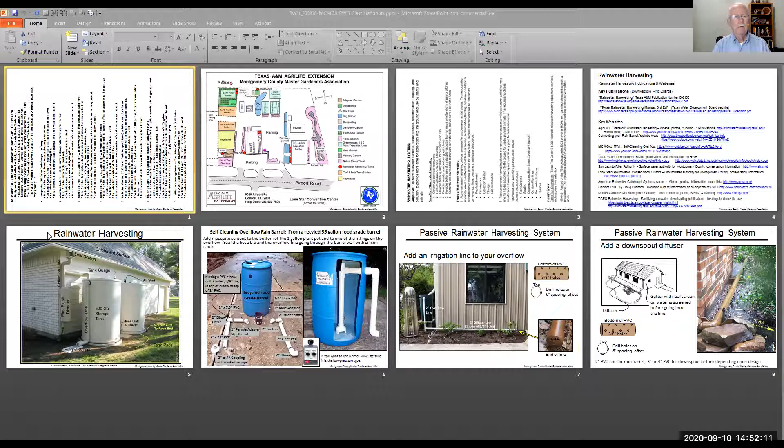This is basically a summary of our projects at the extension in rainwater harvesting. Here's a map showing our project locations. This is a summary of rainwater harvesting in general, just basic bullet points. And this is information on key publications and key websites for rainwater harvesting that could be helpful for you.

This is the detail I wanted to show you specifically. It shows what parts are used in making the self-cleaning rainwater harvesting barrel, adding this cross piece and this vertical section. That's not very much, but it can really save you a lot of work later on. We have a couple more examples. That's what I wanted to show you, and that should be either as a handout or on a flash drive for you.

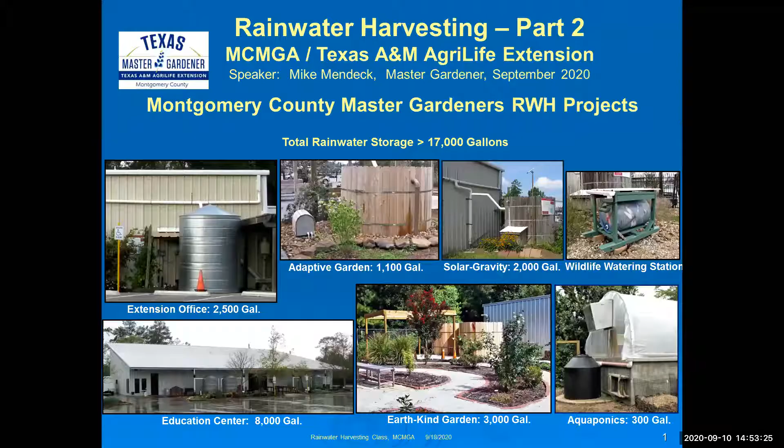So now we're going back to our other shared screen. We finished part one on general information, passive rainwater harvesting, and active. Now we're moving into the uses of rainwater, components, and maintenance.

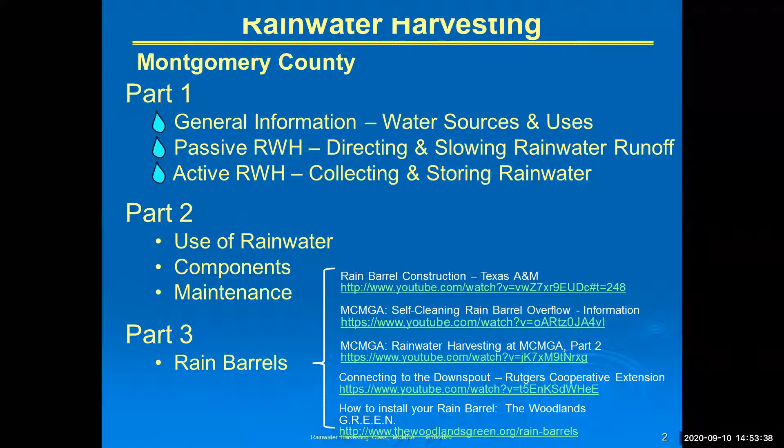Flowers and trees, that's a good use for rainwater, that everybody likes and knows. For vegetables, fruit and vegetables, it's great. For ponds and fountains, not everybody thinks of them, but they're an excellent use for this. Fish, birds, and insects really enjoy it.

It doesn't matter what impurities might be in it - I'm talking about bacteria from bird droppings or leaves or branches or whatever might be there. It's perfectly fine for them.

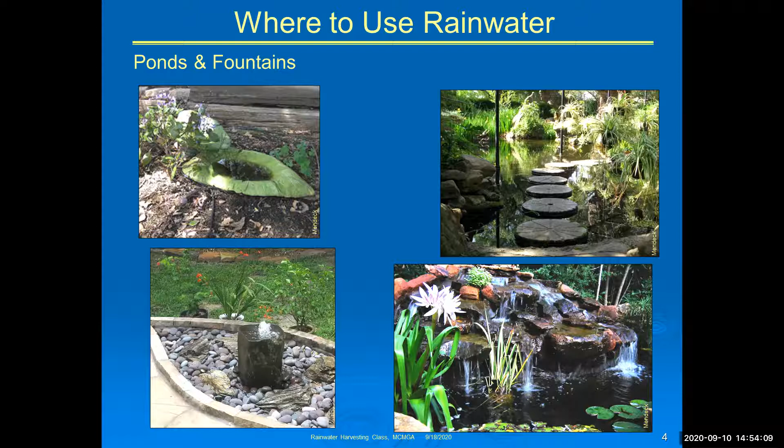Wildlife watering stations, that's one of the things we use them for, and here's one set up. The water is dispensed through a long line, just dripping into this little bird bath slowly, maybe one drip every couple seconds or every 15 seconds, depending on the evaporation rate. There's no pump needed for this - you just have a little valve and turn it on, and gravity pulls the water down. You can crank it open for a full stream, or restrict it down to just a few drops. That's perfectly fine.

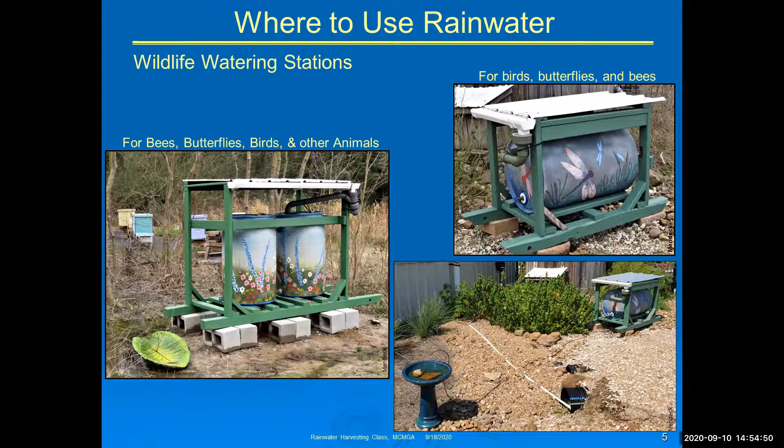Here's one for the bees, also used for squirrels, rabbits, deer, whatever might be in the area - they could use it as well. We also use it for aquaponics projects, excellent for tilapia, and water replacement for the plants that are using it.

What about in the house? Well, think about what happens when rain hits the roof of your house - it's picking up a lot of impurities from, among other things, bird droppings. That's not something you really want to bring into a glass of water in your kitchen, so we don't recommend that. Most of us are paying for municipal water, or we have wells with a filtration and sanitizing system set up for it. So that's what you want to stay with.

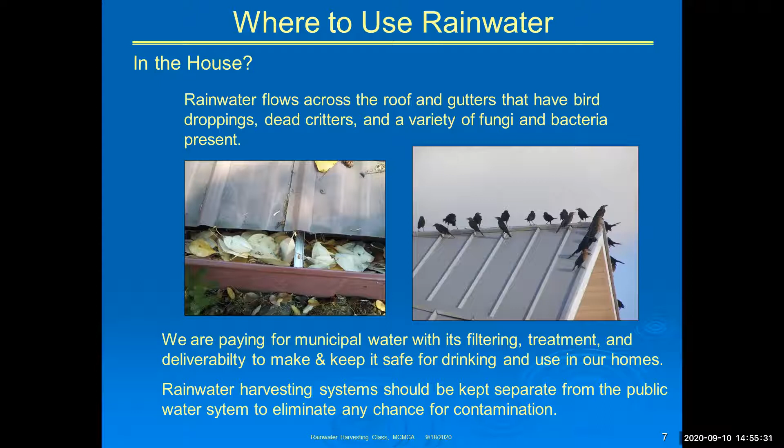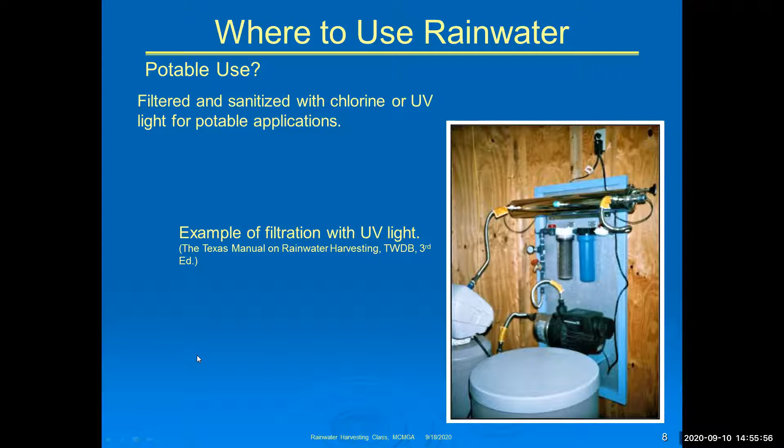Use this water that you're collecting for your irrigation or for your gardens. If you want to look further into setting up a filtration and sanitizing system, you can go to the Texas Manual on Rainwater Harvesting, third edition - remember I mentioned that earlier. This is an example of a photo from there. They go into that in some detail, and that can help you decide if that's something you want to deal with, but that's not what we're recommending for this class.

What about for lawns? A 2,000 square foot roof would collect about 1,000 gallons per week in Conroe, because we have an average rainfall of about 1 inch per week. This is enough water, coincidentally, for a 2,000 square foot lawn. So you're putting your money, expertise, and maintenance into collecting special water that can be used beneficially for your plants or your ponds.

The benefit here is that municipal water, as part of its sanitizing process, has a lot of chlorine in it, and that's going to hurt some of the wildlife, if not stunt their growth, to slow them down.

They're not going to thrive as well as they would without it. So we recommend you use your quality rainwater for your special items and use your municipal water, which is already set up for landscape, because it has chlorine in it, and most of your grasses are very tolerant to chlorine. There are a lot of fish and wildlife that aren't tolerant of chlorine.

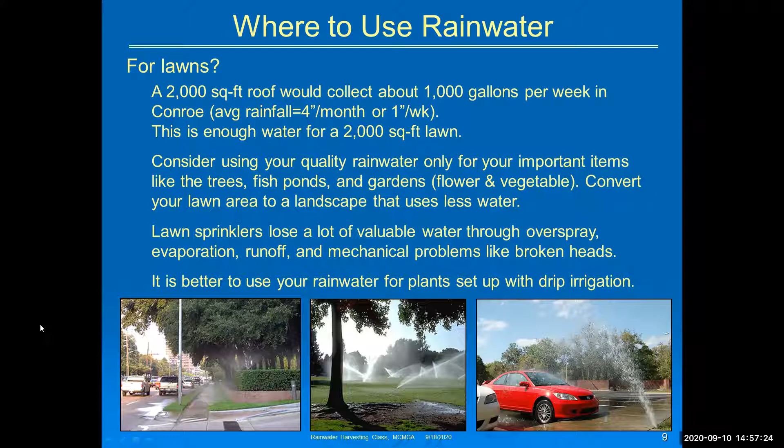Lawn sprinklers also lose a lot of valuable water, which you'll hear more about when you go through the drip irrigation training. Evaporation, overspray, runoff, mechanical problems like broken sprinkler heads, and so forth. So you just want to avoid that. Save your rainwater for your good plants.

Benefits: one, it reduces or eliminates wasted water. There's no runoff, little evaporation, and no water lost on sidewalks or overspray. Better plant health, because the water is applied directly to the roots at the soil level, and it's better able to meet the plant's needs and reduce diseases. With less runoff, your fertilizers and pesticides will stay where they're needed. And if you're using brackish water as a watering source, drip irrigation reduces leaf damage by not wetting them.

Something a lot of people don't think about: you'll have lower home maintenance costs, since the water isn't spraying the house or the fence, so patching and painting is reduced. How many of you have walked or driven past houses or fences where you can see that a lawn sprayer typically sprays the fence siding or house siding, and it's become bleached out and discolored? That's what happens, and you're gonna have to treat or paint it. By going to drip irrigation, you don't have to worry about that as much. And windows aren't sprayed, so less cleaning is needed. So your spouse will be happy as well.

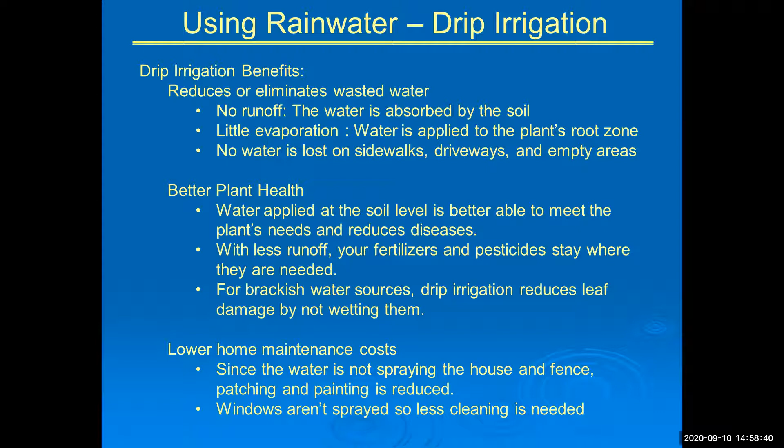So, components. We're going to talk about, for active rainwater harvesting, the collection systems, water cleanup at inlets and overflows, dry and wet systems, and water storage.

This is actually part of a housing project up in Austin, Texas. It's where we had the ARCSA meeting and training in 2010. It's quite impressive—an energy efficient house. They have a 2,000-gallon rainwater collection tank that provides water not only for drip irrigation, but also for flushing the commodes.

I like this photograph. This is a picture looking out across some of the subdivisions or hills of Berkeley, California. I liked it because it had a lot of examples of different roof types. You've got tile roof here and here, a wood roof, shake shingle here, and it looks like some sort of composite roof there. Flat rooftops, steep rooftops—this is a shale or slate rooftop. A very steep rooftop here. Another flat but sloping rooftop, and so forth.

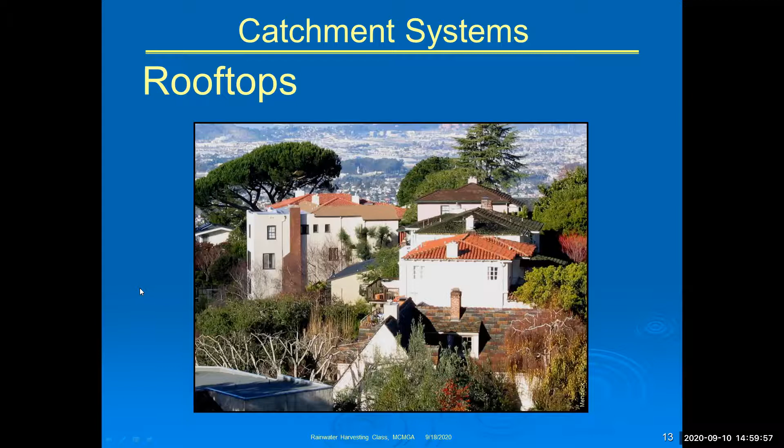Depending on the rooftop you have, you might want to consider what you're going to use your water for. The best rooftop for collecting water is a metal standing seam rooftop. It's nice because the dust and debris that falls on it usually gets blown off. This is a fairly steep roof, and for that reason we wanted to design it so it would not only collect water but also stay clean. It also means you may have more dust and dirt blowing into these gutters here.

Anyway, so we've got 4 tanks, 2,000 gallons each, for 8,000 gallons of storage. This rooftop is about 10,000 square feet. So if you have a 1-inch rainfall, you're going to collect about 6,000 gallons of water. That's enough to fill these tanks three-quarters full, each tank three-quarters full, with a 1-inch rain. Now remember, we get 48 times that during the year, so that's quite a bit of rain coming off this roof that you can do something with.

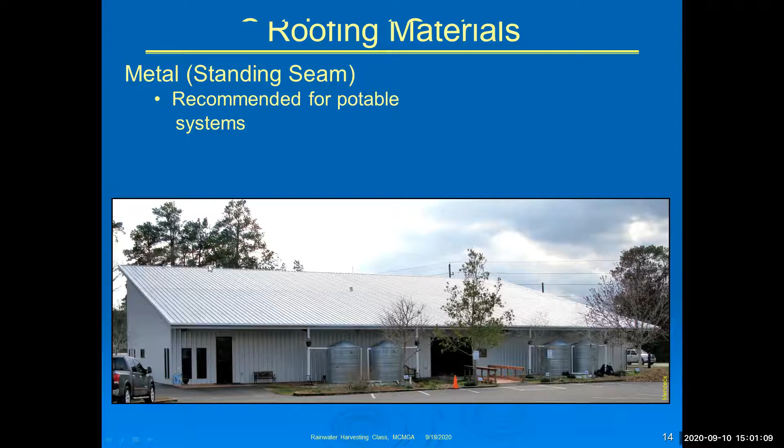We already talked about the cleaning of dirt and dust. The runoff coefficient is the highest of the roofing materials, about 95%—very effective. Asphalt shingles, composition shingles, are most common in our area. Again, we have these on a steep roof, which helps quite a bit.

Even though they're very rough, they will absorb and trap moisture, so you're going to lose some of that. Their efficiency is not as good as the standing seam, but it's still quite good. And you don't have to worry so much about contamination because it doesn't stay on the roof very long. With a steep angle, it just sheds right away, and there's not much dirt that this picks up either because it is fairly steep.

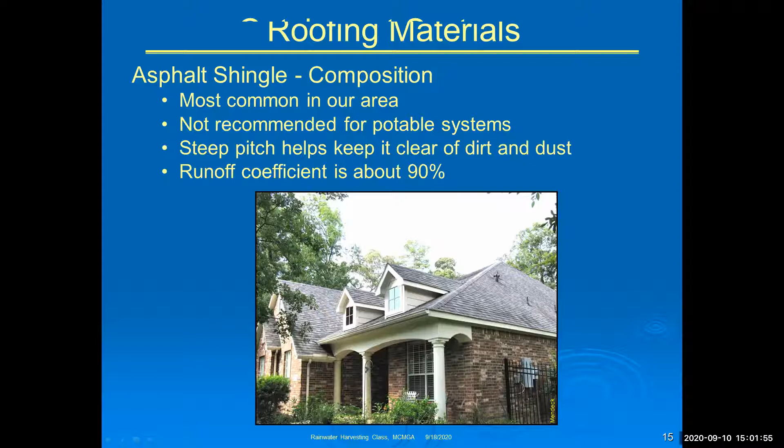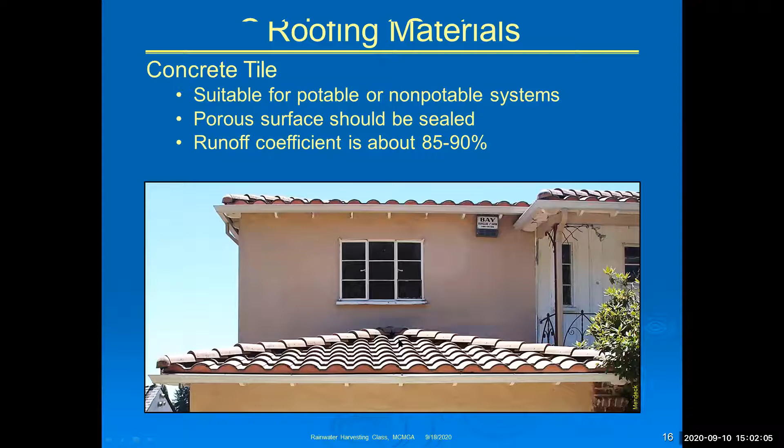Runoff coefficient is 90%, 85%. Concrete tile is suitable for a variety of different systems, but because it's a porous surface, you need to seal it or have it sealed. The runoff coefficient is 85 to 90%.

Flat rooftops, water runs off, as you might expect, very slowly. It collects a lot of dust and dirt and windblown debris, so it takes a long time to clean it. In fact, I don't know that you really can clean it. You're just going to have to figure out a way to clean it up once it gets in the tank.

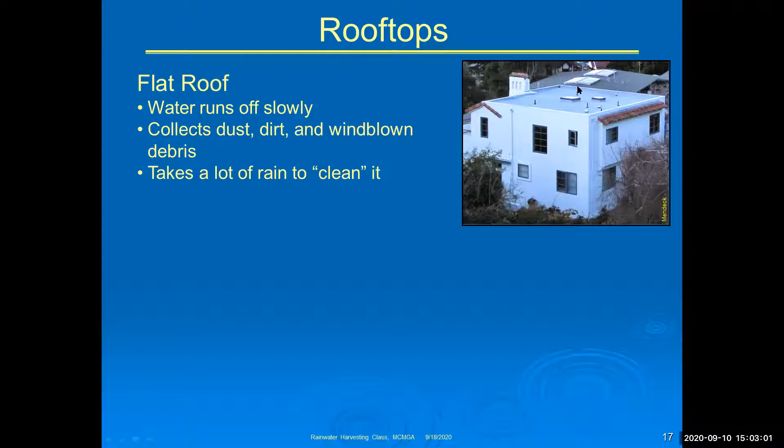And there are ways we're going to talk about doing that. A concern you might have is if you have a drain, like a ceiling drain that drains off the roof, if you have a lot of debris, watch out with a big windstorm because it could blow these plastic bags you get your groceries in. Those float and fly around quite easily in a good windstorm. You could get a couple of these up on your roof and they could end up plugging up whatever those drains may be or where they might be. As a result, the flat roof would fill up with water, which could increase the weight considerably, causing some structural damage. So be careful.

Steep rooftops, just the opposite. Water sheds quickly, and it also gets rid of the dust, dirt, and windblown debris easily. First flush rain easily cleans it. Less time for water to absorb chemicals from the roof materials.

Green tile or green rooftops, you don't hear much about them here. You're hearing more about them in large cities and back east, like in Washington, D.C. Also, they're very common in Europe. In fact, many cities in Europe will not give you a permit to build unless you have flat rooftops, that is, unless you have it set up for a green application.

So it produces lower temperatures on top and in the building, thus reducing runoff during rainstorms. Good sound insulator, keeps external noise low, reduces dust and particulates from the air, increases amenity spaces for displaying, growing, and possible recreation.

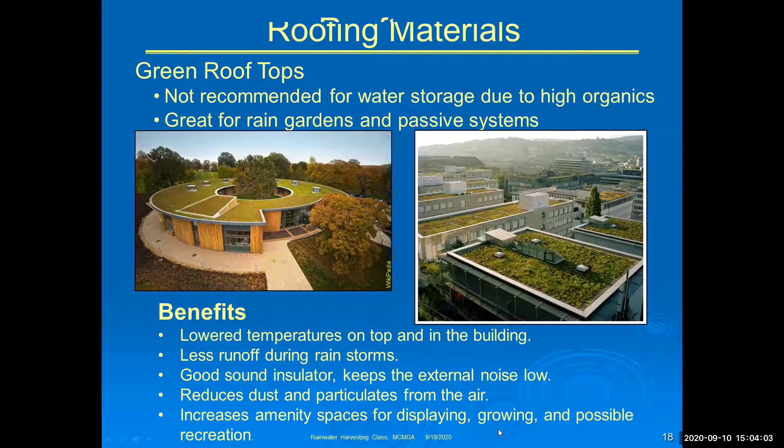So in summary, metal is good for rainwater harvesting. Asphalt roofs are good for irrigation and ponds. Tile and cement should be sealed. Steep roofs, water moves quickly, sheds dirt and dust easily, with low absorption of chemicals from rooftops. Flat roofs, water moves slowly, making it difficult for the first flush to do anything. You might want to think about cleaning up after it gets into the tank, otherwise you may lose too much water.

Older roofs, watch out for lead contaminants from the flashing. That's something we didn't talk about, but flashing in the old days was actually made of lead. They liked that because they could put it around the stack pipes that come up through the roof, and they would be able to tap those into place and shape them very easily, making for a watertight seal. The problem is, of course, they're lead. A little bit won't hurt anything, but you want to try to minimize it in most cases.

Green rooftops are not good for storing water, but it is good for directing water into garden areas like a passive rainwater harvesting system.

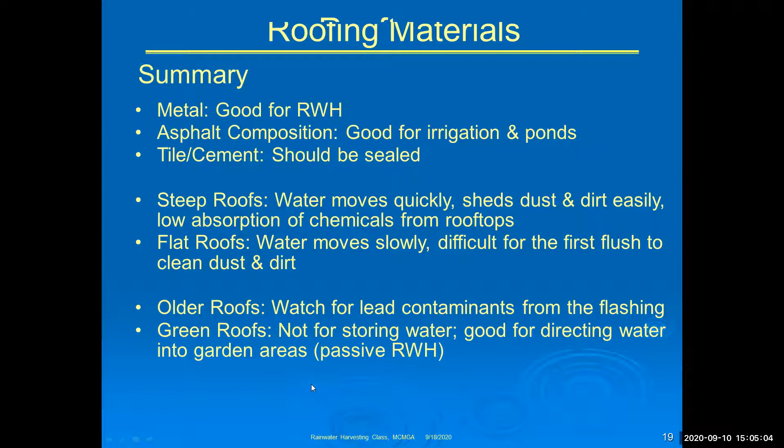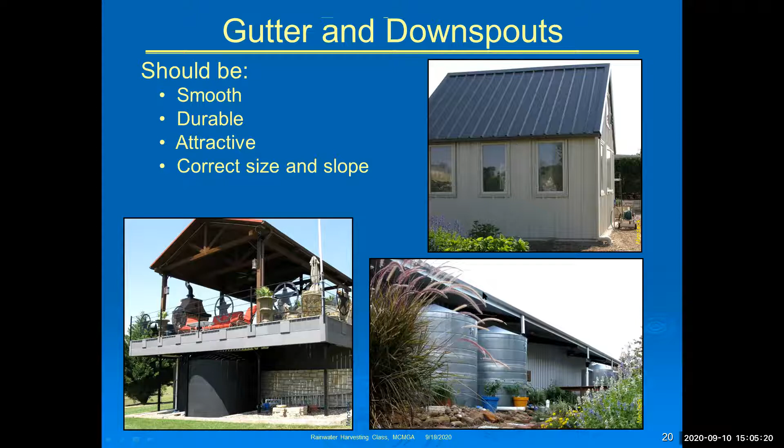Gutters and downspouts should be smooth, durable, attractive, the correct size and slope. We're not going to go through the details on how to set these up, how you connect them, or what size is appropriate. There's so much out there online. You can always go to Texas A&M's website for rainwater harvesting — they talk about conveyance and sizing of the gutters. You can also go to Harvest H2O. There's a lot of information out there for that.

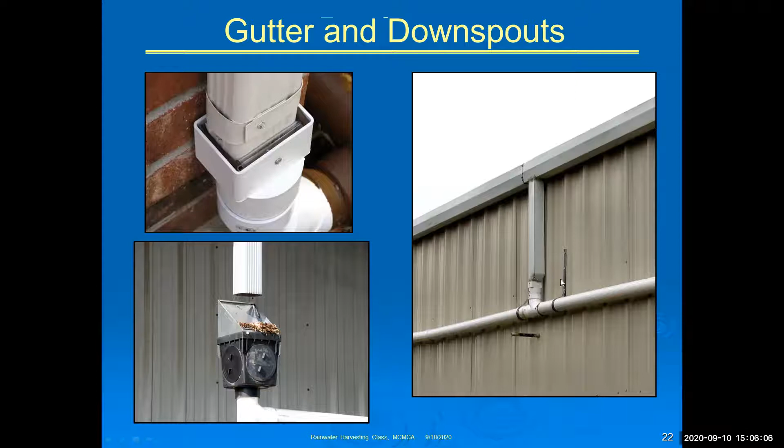Gutters and downspouts may occasionally require some innovative fitting. For example, here we have a rectangular downspout going into a somewhat different sized rectangular collector that goes into a round delivery line. So you have to do some sheet metal shears, trimming and cutting, and maybe some riveting, then some caulking to seal everything up.

Components of active rainwater harvesting systems: we've gone through the roofing, gutters, and downspouts. Now we're going into water cleanup at inlets and overflows. This is particularly important because we want to keep that water as clean as possible so it does the most good. So, first flush diverter, we mentioned this earlier, right here.

There's also a self-cleaning overflow inside the tank, and this is a leaf and insect screen at the top. So the water comes off and goes in. The coarse debris rolls off the screen onto the ground around this feature. Then the water that goes through the screen drops down into this first flush collector.

By the time this fills, the water coming off the roof has cleaned up considerably, and now it's being diverted into the tank. Once it's in the tank, the water will tend to settle. Any particulates that got through the screens in the first flush will settle down in the bottom of the tank. That's where we have a self-cleaning overflow screen that will take care of that, which we'll show you the details of in a minute.

Let me show you this, the last tank before we go to the pump. One of the connections came loose, so we had to go back in and take care of that, and we were curious after 5 years what this looked like. We found less than 1/8 inch of sediment in the bottom of that tank. In 5 years, that's really good. We're not going to have to clean this area much at all, at least not while I'm still alive, I don't think.

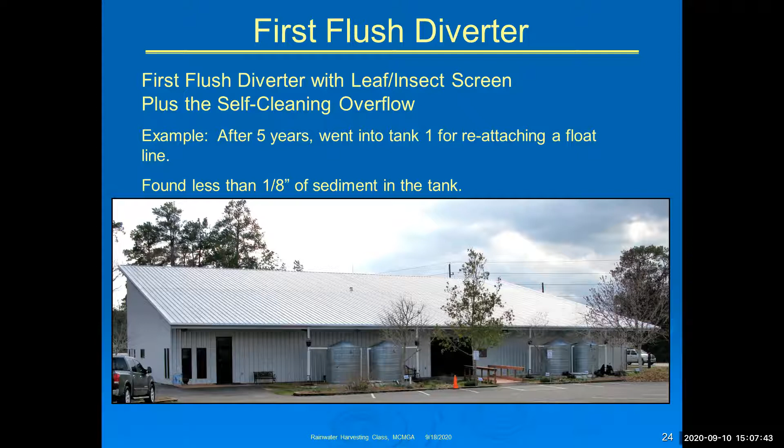This is a close-up of that first flush diverter and leaf insect screen. Here's the downspout coming off the roof. The screen is up in this panel right here, and then it drops down into this collector for the first flush of water coming off.

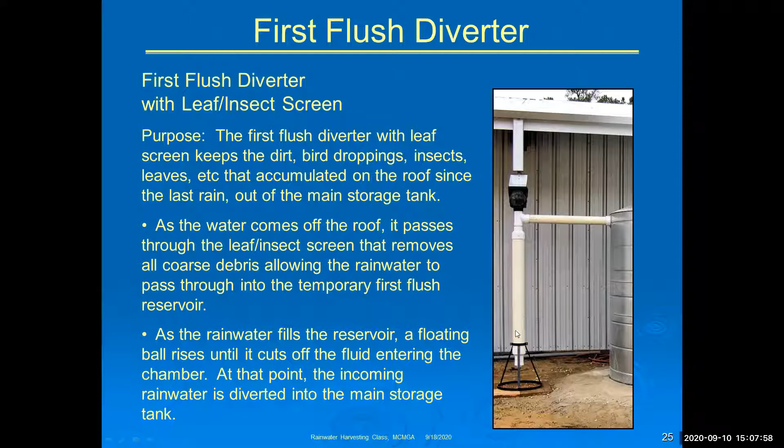This is a commercial one, the last one was homemade. This is a commercial one you can buy and order online. It's very simple, very easy to get to, and very easy to install. Just make sure your pipe fittings that come with the system are American versions, so you don't have to do some adaptation to mix between two different size tubings.

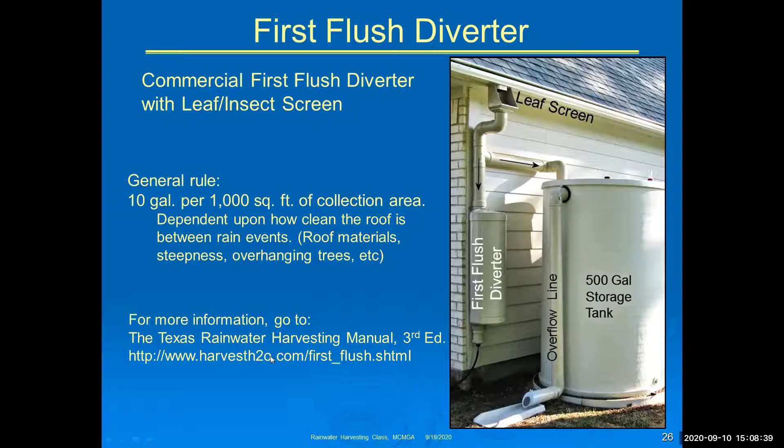General rule: 10 gallons per 1,000 square feet of collection area. It depends on how clean the roof area stays between rain events, which means how steep the slope is and the type of material it's made out of. For more information, go to the Texas Rainwater Harvesting Manual, 3rd edition. There's quite a bit of information in there about that.

Now, the simple overflow is, as you might expect, water comes in and is delivered into the tank. Usually they have a take point about 6 inches above the base, and it'll collect debris and dirt and gunk down there, and the water gets stagnant. But that's okay because you're not using it. However, at some point, it's going to build up over the surfaces of your take point where you're using it to bring water out of the tank or barrel.

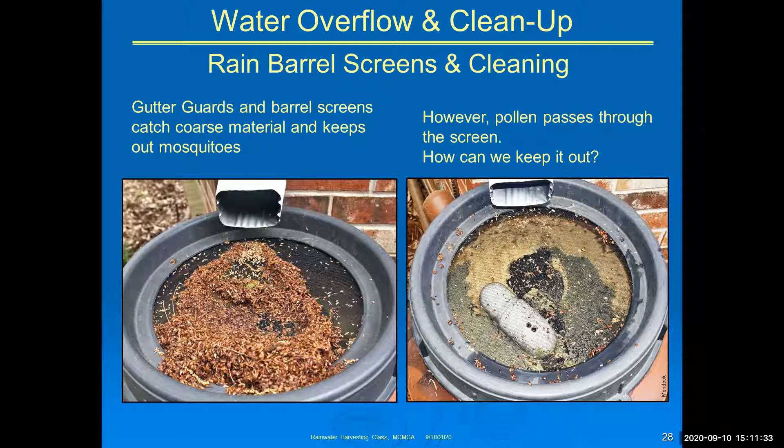And it's at that point that I decided, let's adapt the large tanks for self-cleaning overflow to the small tanks, to the small rain barrels, and it works great. And this is one of them. This is our demo that we use for teaching.

And all we've done here, this is basically what everybody else does. And this is what we started doing. We've added this little cross piece and a T at the top and an opening at the bottom. And water comes in, as I already described to you once. I won't go through that again. But basically, it's very easy to follow and very easy to do, and you can visualize it.

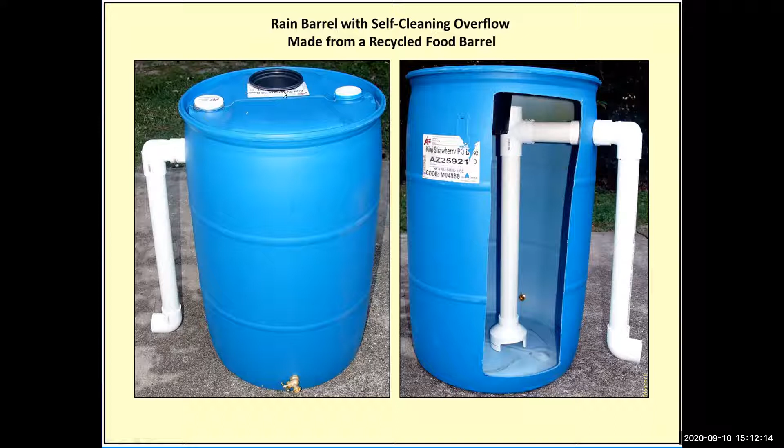None of these are screwed together. They're just tapped in place because it's a very fine fit. And that way, also, if you need to take something apart, you can get to it very easily. The top of this opening right here is big enough easily to get this material in and hook it up. It's not a problem.

Here's an example of an overflow line set up. This diffuser line is set up coming off the overflow line of a rain barrel.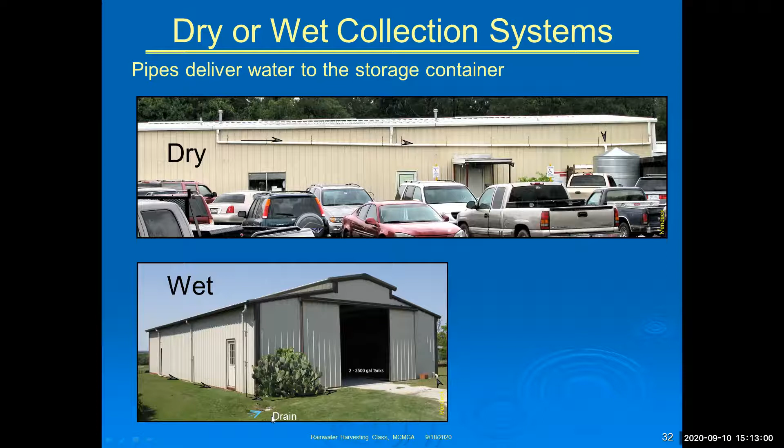Wet system, everything goes into a lower section of pipe to communicate with your tanks. And at some point after the rain event, you need to go out there and open it up to clean it or drain it, let it drain. And so that's why we show this as a wet system and this is a dry system.

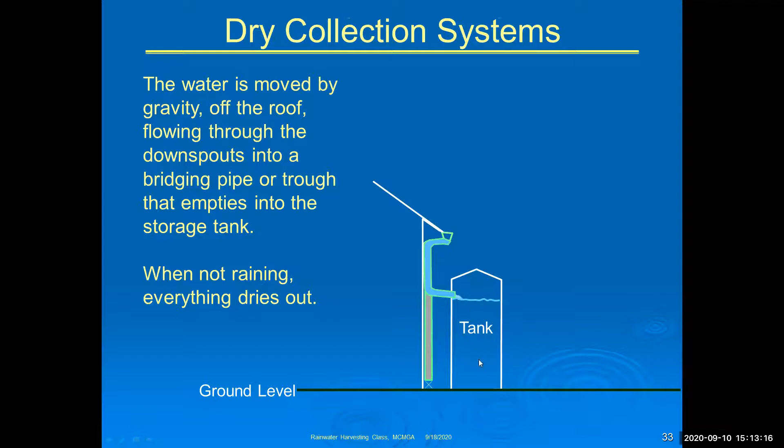An example of that, another diagram, you can see the water coming off the roof going down into the dry system. Here's the first flush diverter, so that initial flush of dirty water, and then the cleaner water goes into the tank, which is where you want it to go. And when it's not raining, everything dries out.

Wet containment, wet connection is something like this, where the water comes in, goes underground or down low, and then back up into the tank. This is typically what happens with water. It will take a U-tube effect. In fact, they used this as a leveling process years ago when they were putting in the railroad to make sure that they had the right slope on their tracks or on their beds.

Works very well. Let's see. The only problem is that if the water sits down here, it's going to get smelly and stinky, and it can end up with mosquitoes and other things.

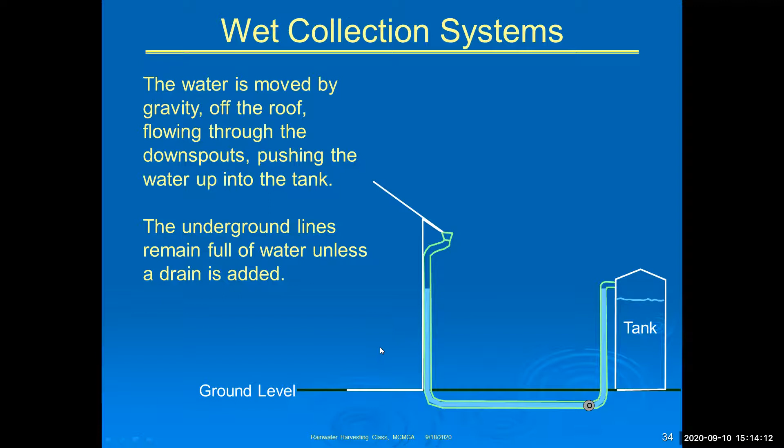So you need a way to clean it out. You can dig a trench or a hole and make a small cistern with a little opening that you can open and drain, clean out if you want to, but it works very well. Let's see, is there anything else on this? I think that's about it.

This is an example of the wet system. The water is coming off the roof and going down, coming over here and up into the tank.

And here is a first flush diverter. You've got a little cap on the bottom. What they've done is unscrewed that cap, or clean out, so that when it's empty or not raining, the water will drain out through here. You can use this as a site for going in to clean things out if it's gotten too mucky in there. It works pretty well.

You can use leaf screens on the gutters, or where they come off the gutters, to clean out the loose debris. You don't want to put leaves in your tank because it's really hard to get them out, and it'll really smell bad.

Okay, wet system conveyance. No trees over this roof, so it's pretty easy to stay clean. Again, keep the underground pipes drained, keep the valve slightly open or closed, and then open up between each rain event. Be sure the drain opening is screened with a hinged cover to keep out the critters, because they will get in there and look for mischief.

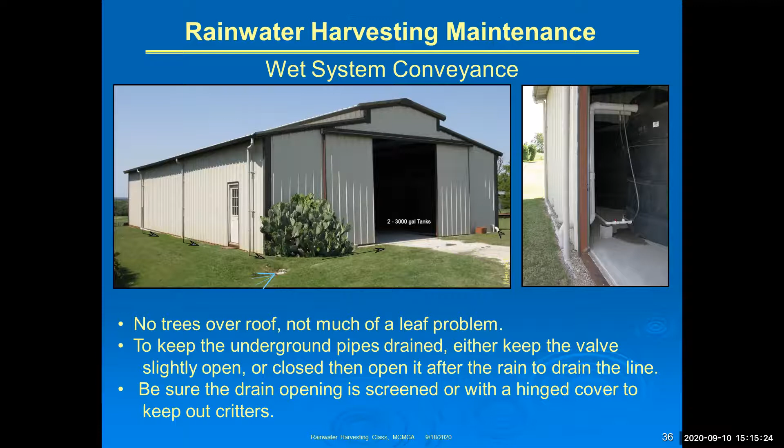Next, we're going into water storage. Here's a caution: tanks are heavy. Water weighs about 8.3 pounds per gallon. Be sure they are stable and cannot be pulled over. Watch for erosion around the base. Lock or bolt tank access to keep out children and animals. Screen all openings to keep out mosquitoes and critters. Keep your neighbors happy, and yourself happy too.

Check water quality. If the bacteria level is too high, treat it per TCEQ's recommendations. TCEQ is the Texas Commission on Environmental Quality. We don't list what they recommend here because it may change. Go to their website and check the list of websites we've added for additional information, and find out what they recommend at the time you're doing that.

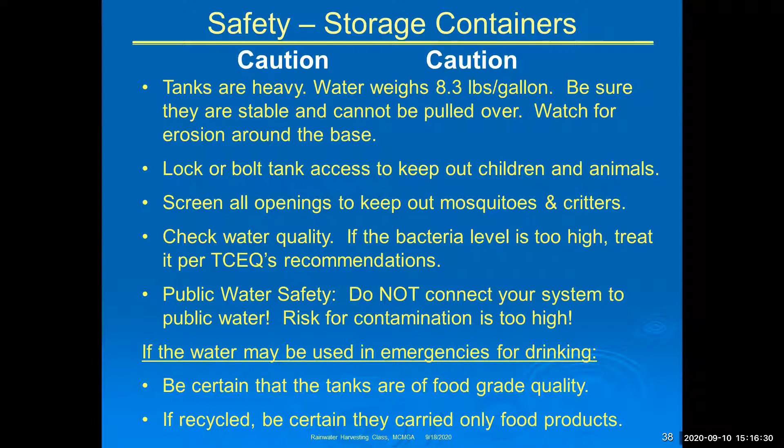Again, public water safety is paramount. Do not connect your system to public water. The risk for contamination is too high, and the damage would be miserable. If the water may be used for emergencies or drinking, like during a water shortage, be certain the tanks are of food grade quality. And if recycled, be certain they carried only food products.

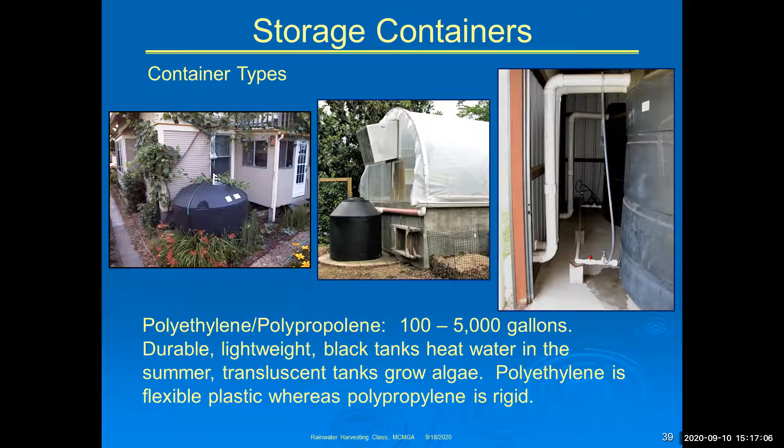Container types: we've got polyethylene and polypropylene, anywhere from 100 to 5,000 gallons. Durable, lightweight. However, black tanks will heat up in the summer, so keep them in the shade or build a cover for them. You can have the cover provide water into the tank as well. Translucent tanks grow algae, so we don't recommend translucent tanks; get something that's black. Polyethylene is a flexible plastic, whereas polypropylene is fairly rigid. Most plastic tanks you see today are polyethylene.

Prefabricated metal tanks, up to 2,500 gallons generally, lightweight and zinc dipped to reduce corrosion. The interior is usually painted with food grade paint, or you can get a liner that goes in there as well. This is here in Montgomery County.

This is also Montgomery. These are the Lone Star Groundwater Conservation District tanks that they have on display. They do an excellent job. We'll talk more about what they've got set up there as well.

Corrugated steel tanks, 200 to 10,000 gallons. These are big, and you don't see them too much because they're pretty heavy and bulky to move around. They have additional cost because you have to assemble them. But if you're installing a fairly large rainwater tank in a hard to access area, you can actually transport these up by mule if you want, because they break apart or unbolt into separate sections, so you can unbolt them and carry them up.

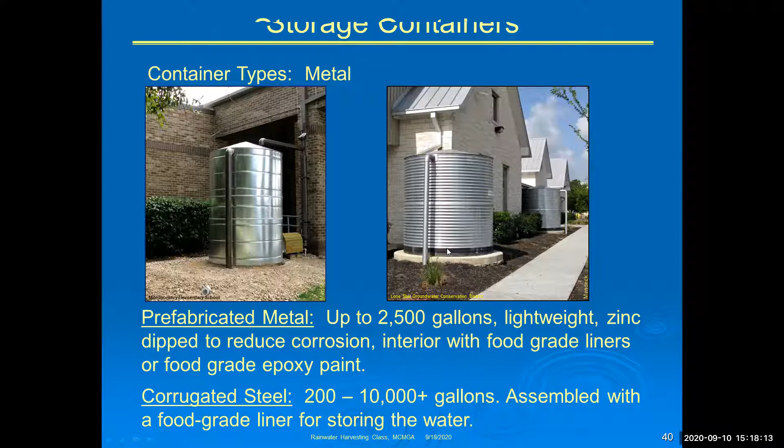Fiberglass tanks, 300 to 15,000 gallons. They're long-lasting and easy to repair and can be painted.

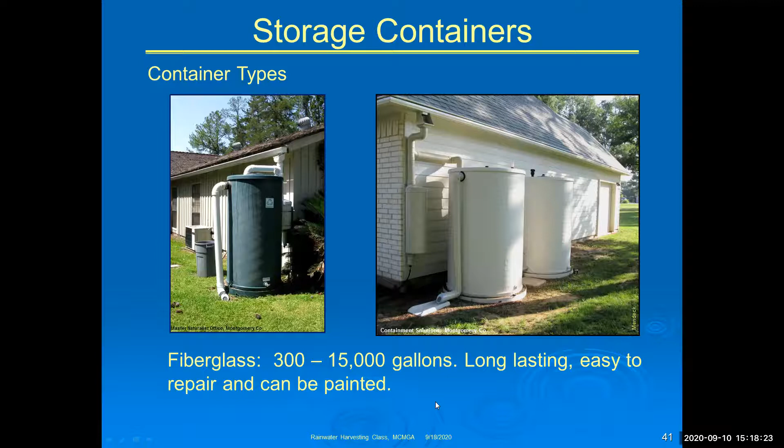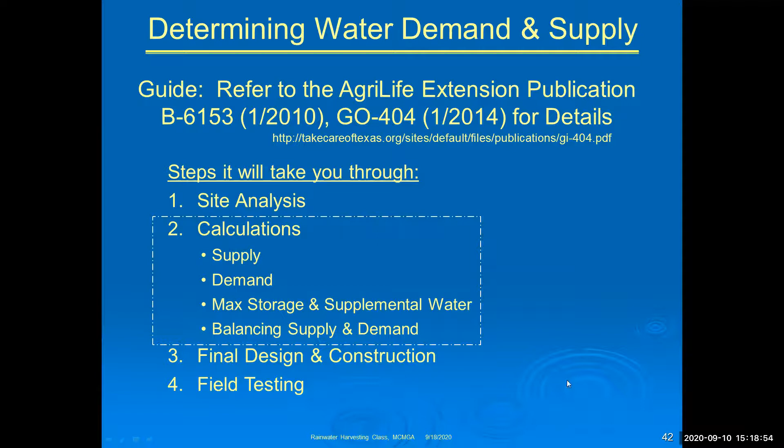Now a guide for determining water demand and supply. Again, go to that Agrilife Extension publication B6153, Rainwater Harvesting, also known as GO-404. It'll take you through the steps you need to follow. The big thing to focus on are calculations for supply, demand, max storage, and supplemental water you can determine, and balancing supplies and demand. They talk about this as well, but this is the area you're going to want to spend the most time on.

So water collection, just like we do for rooftop determination: rainfall times catchment area times 0.62, that conversion factor we talked about earlier, and the runoff coefficient.

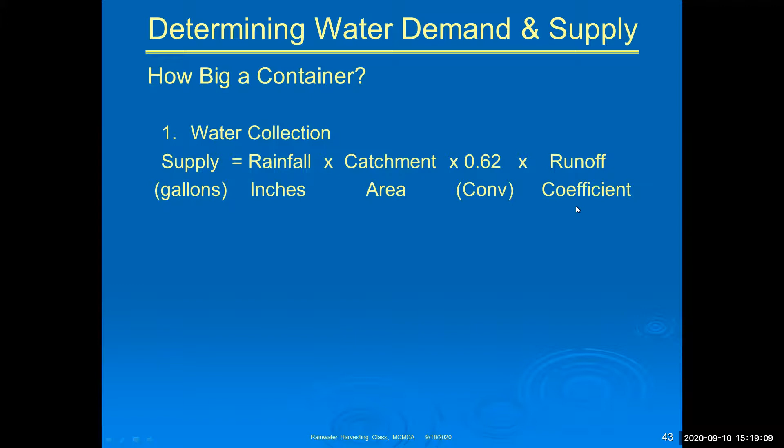Water usage, its demand, is determined by ET, which stands for evapotranspiration, and basically it's how easily or readily water comes off the leaves of the plants you're using. Some plants need a lot of water for that reason; other plants don't need it quite so much. So that's going to determine a lot of how much demand you'll have from your plants.

Irrigated area, here's the conversion factor again. Notice it's the same, 0.62 gallons per square foot. And then the plant coefficient.

We talked about evapotranspiration and plant coefficients. Plant water use represents the water needs of a plant. A low water plant has an evapotranspiration coefficient of 20%. So we're looking at 20% here, 50% here, and 75%.

Notice your grasses are the biggest users. So if you want to save water, if you want to conserve water, think about changing your landscape from mostly lawns, which can look nice of course, to something more like plants and shrubs that are low water use. Now you can actually go cactus too, but here we've got too much water for a lot of cactus.

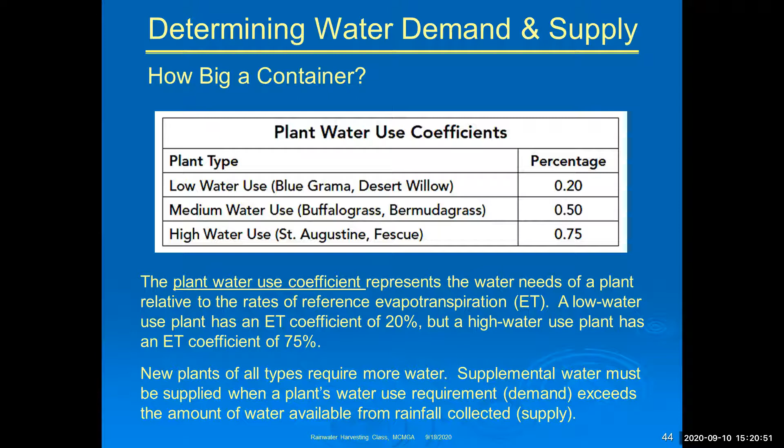So then compare the monthly collection versus demand to identify the makeup water we might need.

Most people will try to identify the tank size by determining what the 2 to 4 week available rainfall is, and then install that size, or the size that will help with rainwater harvesting and also look good in their yard. You know, we have to keep your neighbors happy and your spouses happy. That's something that's a concern for everybody.

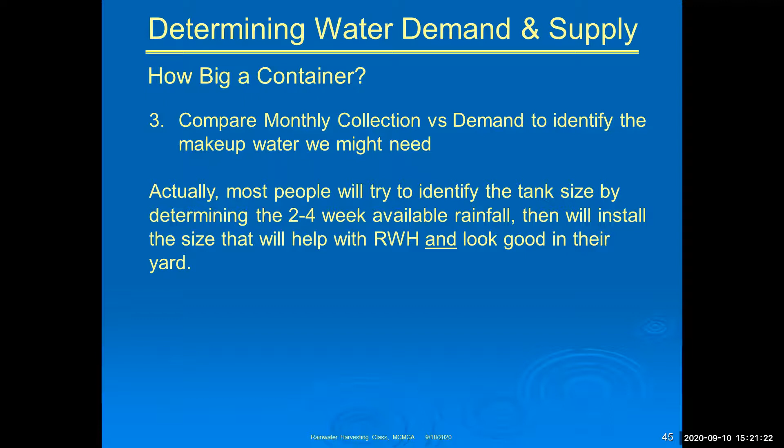So for our area, we get 4 inches of rain on average per month, or about 1 inch per week. 4 inches of rain per month, 2,000 square feet roof area, 0.62 conversion, 80% efficiency. So we're looking at almost 4,000 gallons of water per month that we could collect.

So a 2 to 4 week capacity is approximately 2,000 to 4,000 gallons. That's what you're going to look for. Figure it out for your own area and then make that decision. Is it going to look good, or do you want to go bigger? Can you go bigger? That's up to you.

Or we can calculate, and for that, use the rainwater harvesting manual we talked about earlier from Texas A&M University. They have some details in there you can go with, and there's the website for it.

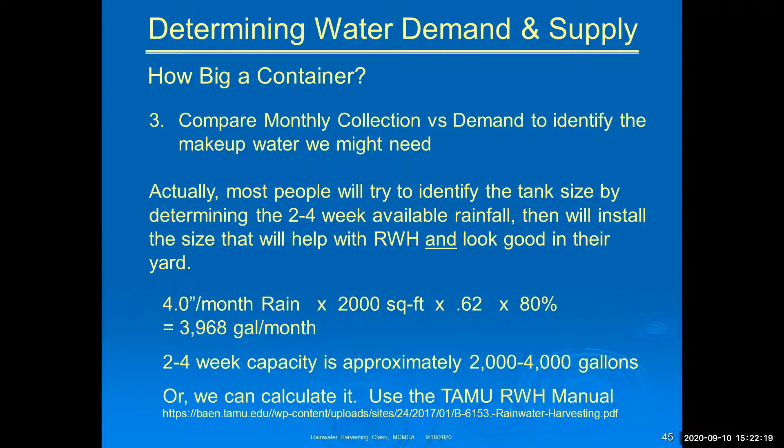Now you can connect tanks multiple ways. We showed several examples of that for our extension office, but you have to be careful how you do that depending on what your objective is.

In this case, the tanks are set up so all the water comes in here, you get stuff settling out, the overflow goes in here, you get stuff settling out, overflow goes in here. Not much stuff left to settle out because it's all up here. So these first two tanks are actually part of the cleaning up process, and ultimately you're only going to have one tank that's useful for your application. These are things you'll need to clean out at some point, so you can plan ahead for that.

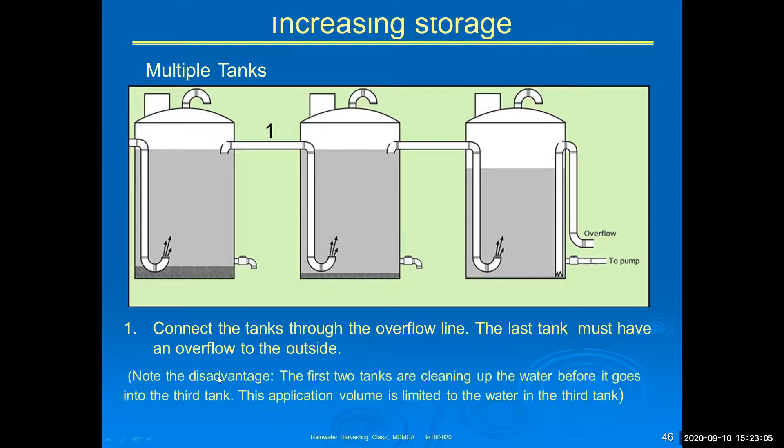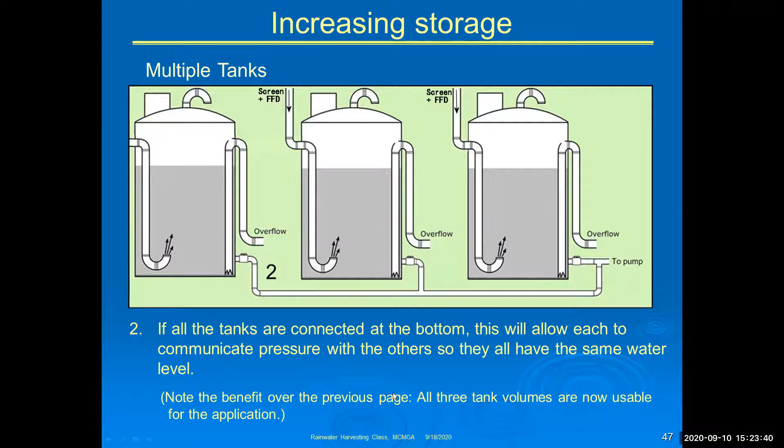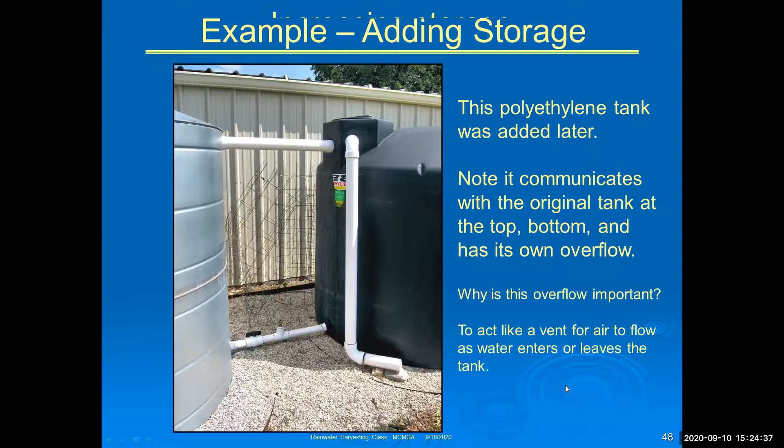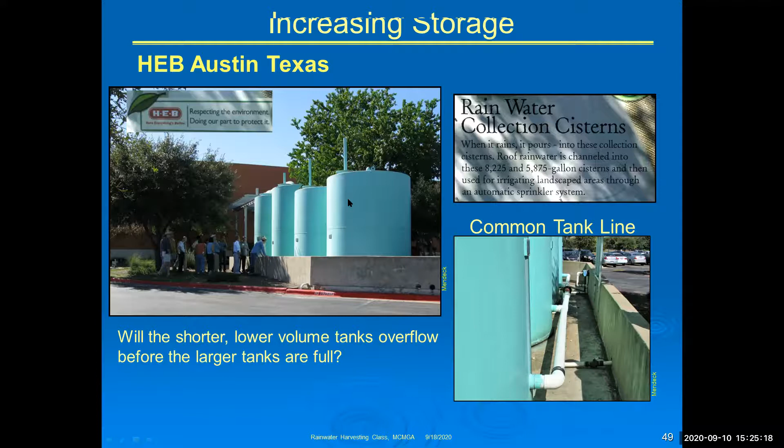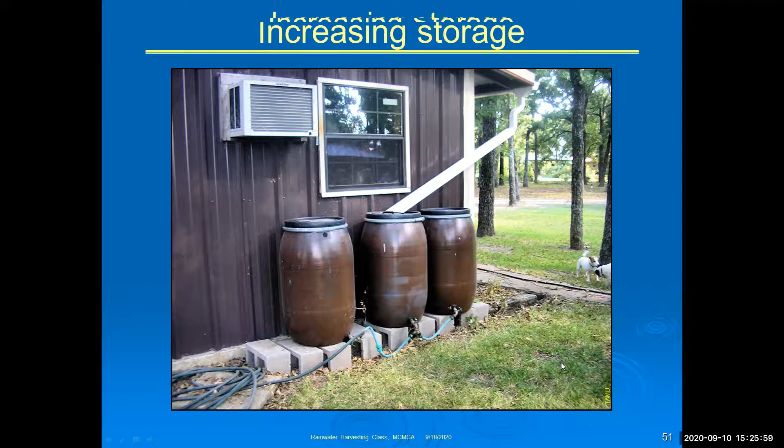This doesn't look very pretty, but it works really well. You've got a downspout, and then it communicates—not much cleaning up is going on—between the rain barrels with these double hose bibs, and that works perfectly fine. Now, whether they're using this for a garden or a place for their dogs to get a drink of water, who knows? The Jack Russells look like they're having a good time out there.

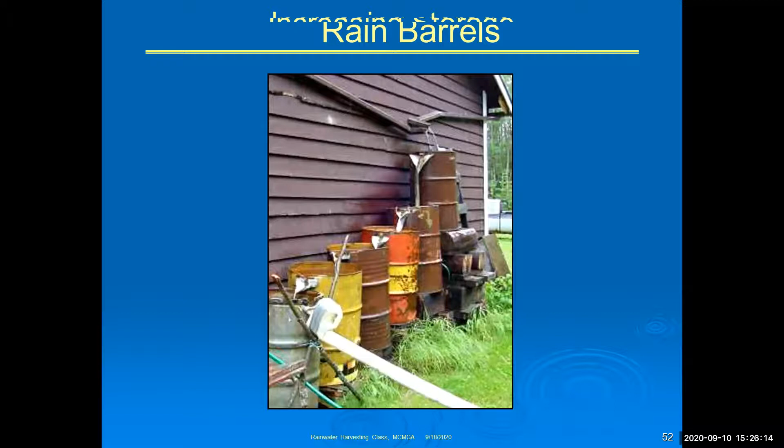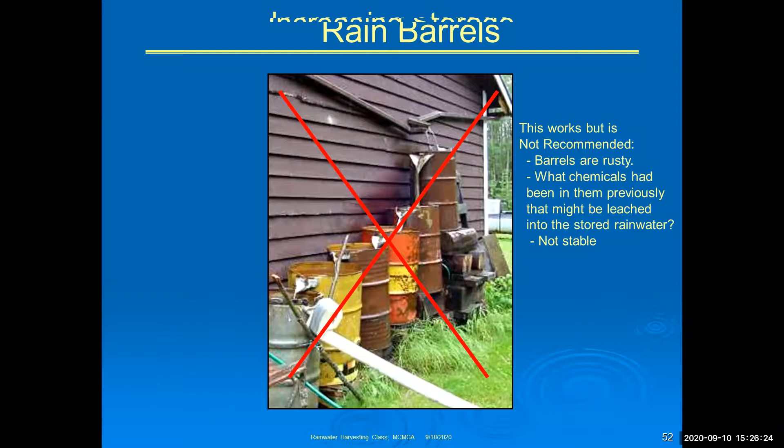Now, what about this one? What do you think about this setup? It is collecting, and you've got multiple barrels all feeding into another, so you are increasing your storage area. But what do you think—yes or no? No, of course not. Why? Because the barrels are rusty. You don't know what chemicals had been in them previously that might leach into the stored water, and it's not stable. So use new barrels, or recycled barrels that have been used for food products.

What about this one? A little bit different—this looks pretty presentable, pretty new, and it'll probably be fine for the first couple months of use. But notice they have these 4x4 posts that go down into the ground, and this is up on stilts. In fact, the house is up—it's not on a slab or anything. The house is up on stilts too, or piers or something.

And what's going to happen is the bottom of these 4x4 posts are going to start rotting in the dirt, or insects are going to start eating them, or there might be an accident where somebody runs into it with a tractor or a lawnmower or something. Anyway, at some point, this area is going to become unstable.

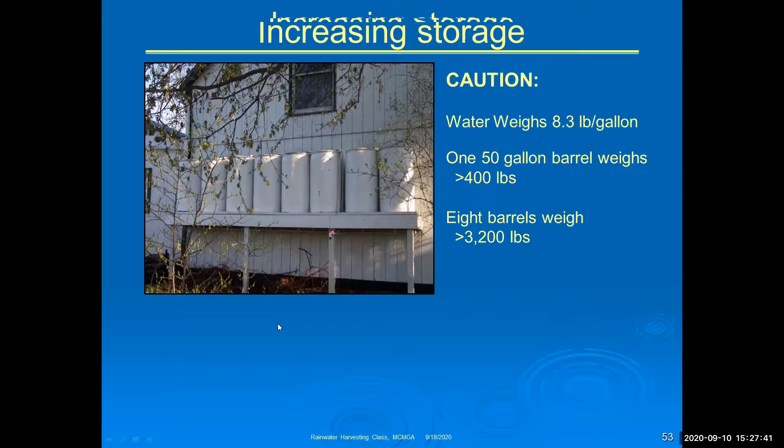So if the poor homeowner or maintainer of these rain barrels comes out sometime and is walking around on this platform to look at how things are going, or maybe make some repairs or adjustments, he might just end up tipping this so that it's no longer stable and it collapses. That could be really dangerous, because remember, each of these 50-gallon barrels weighs over 400 pounds. Not good—to drop 4 or 5 feet would not be good. So that's not a good idea.

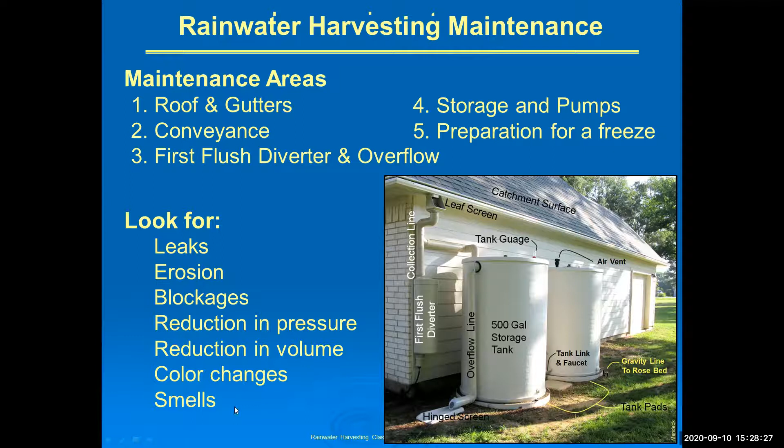So when to perform an inspection? Well, after large storms, anything that changes the water volume or pressure, take a look at it.

Look for leaks. If you see water, it's just like when you approach your car - you don't consciously have a checklist saying, okay, my windows look intact, my tires are all round, I'm in good shape, no scratches on the outside that weren't there when I left it. The same thing for your rainwater system.

As you get used to it, as you approach it or walk past it, you just subconsciously think, okay, everything looks good, I can keep going. But if something catches your attention that doesn't look good, then you need to take care of it to make sure it doesn't get worse, because it can either be expensive or dangerous.

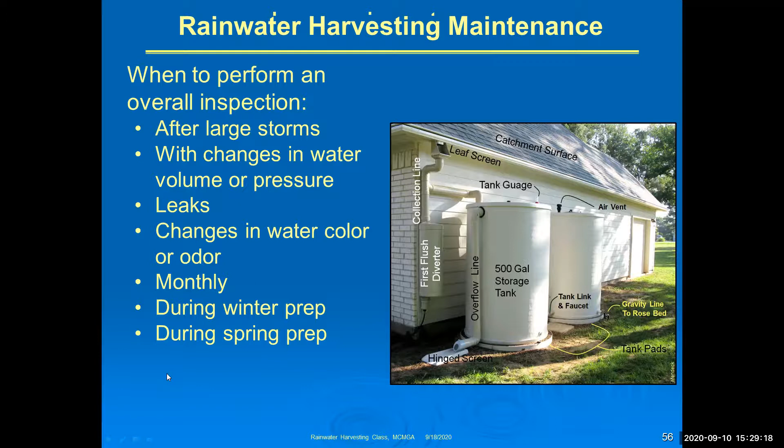So you want to look for leaks and changes in water color monthly, or during winter preparation or spring preparation.

Also check for leaves in the gutters. If you don't have leaf screens, or even if you have leaf screens, sometimes squirrels will get in there through an opening and build a nest, particularly during a drought or hot summertime when you don't have much rain. Bird's nest, squirrel nest - get those out of there. This will keep your collected water clean and flowing smoothly.

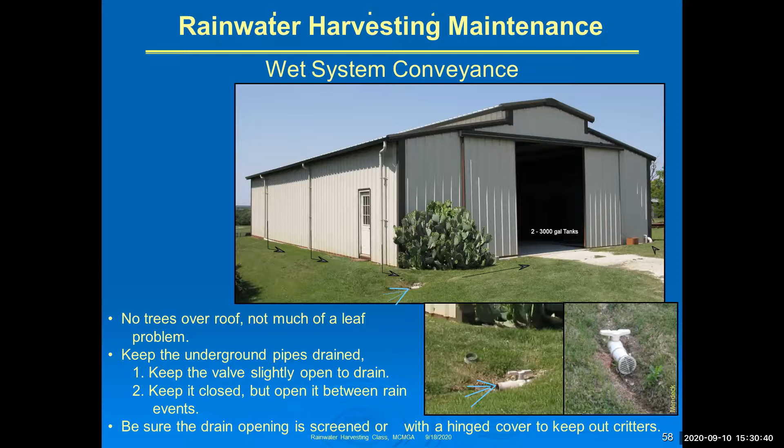Here's examples you can look at. Dry system conveyance - we talked about this before. Make sure that everything is clean and operating.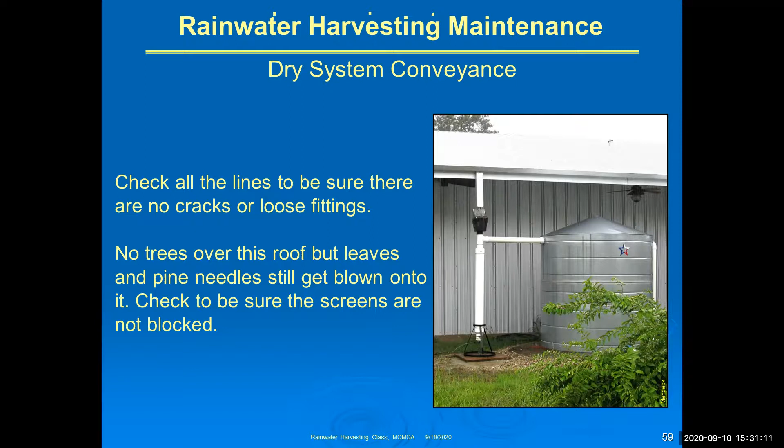Downspouts, first flush diverter and overflow - clean out bugs, leaves, and other debris. This is that screen I was telling you about, and here's another type of screen. Same thing - just take those off, clean them off. Maybe you have to get a ladder or undo a top like they have on the right here.

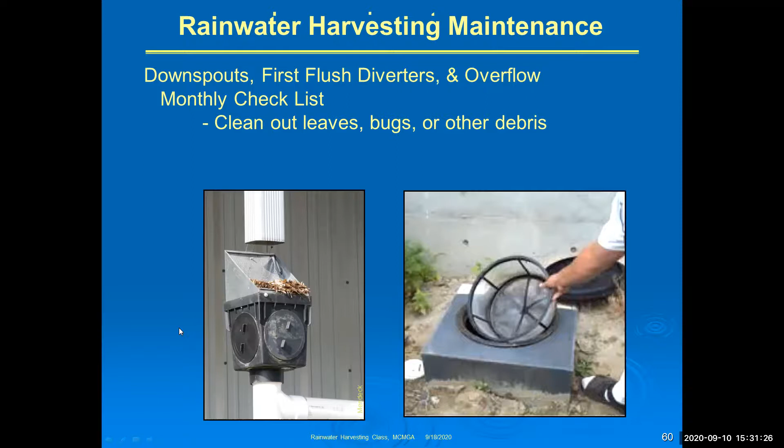Now, a lot of these first flush diverters will have a second screen inside, and you can see it collects a bunch of gunk. You have to clean that about once every couple of months - that's not too bad.

Just make sure you're not wearing good clothes when you unscrew this, because if it's blocked and you've got water stored up above it, it's going to splash out when you open it. Although you'll have some warning when you start loosening this and it starts to leak around it - you'll see that. Also check to make sure your overflow lines are sealed or covered and operating properly.

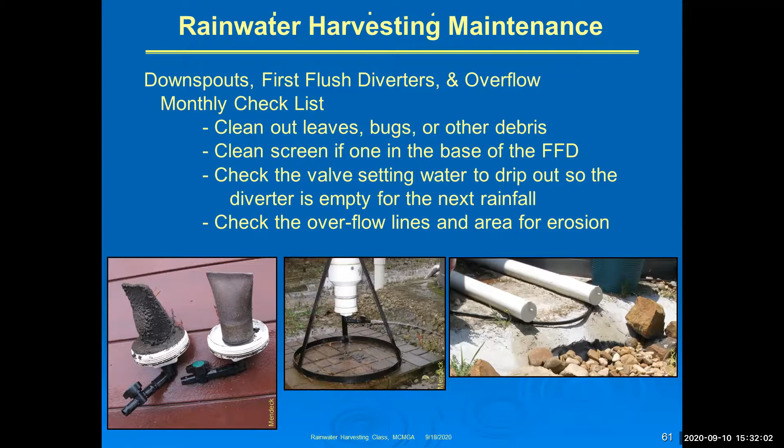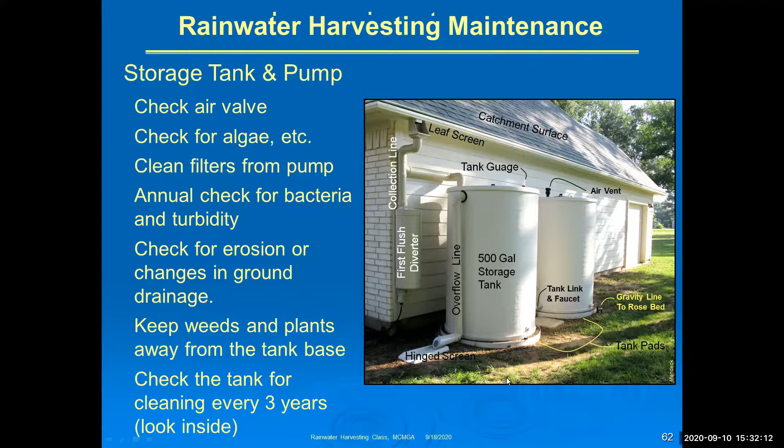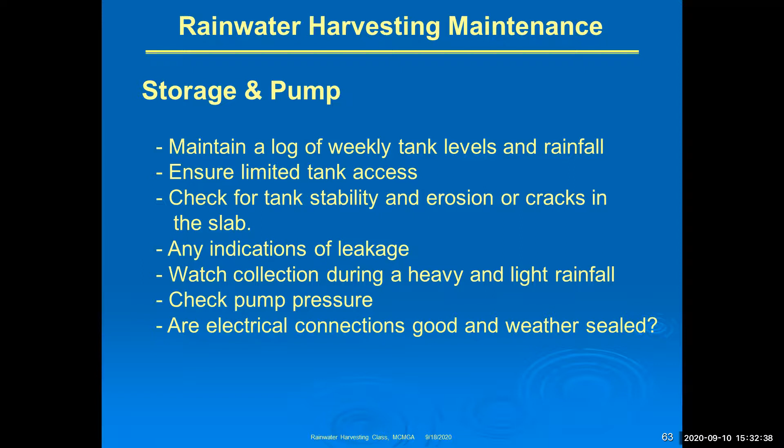Storage tank and pump, check your air valves. Just go over it, check for erosion, keep weeds away from it. Check the tank for cleaning every 3 years, look inside. Maintain a log of weekly levels and rainfall until you're used to it, then you'll have a pretty good feel for how it's going. Ensure limited tank access, check for tank stability, and any indications of leakage, make sure you get out there and fix that. Are electrical connections good and weather sealed? Make sure you don't take a chance, because we're dealing with a water system - make sure there's no chance of electrocution.

Water color and odor - if it's unusual or different from normal, check it out. If it smells bad, don't taste it, please. If it smells bad and looks bad, it's probably bad. Check with the TCEQ recommendations for either a bacterial analysis or just clean it yourself - they have recommendations on how to clean it.

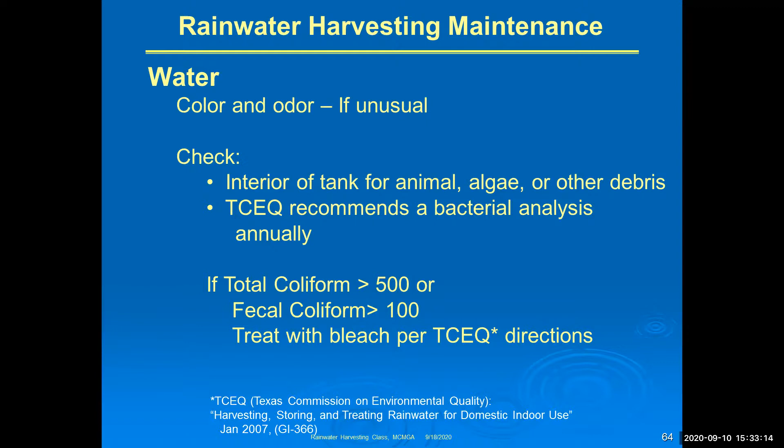These are the limitations for irrigation water. This is not even going into your house. Irrigation water is much less controlled than house water because they want to keep people healthy. Keep that in mind.

We do have cold weather here, and it can be a problem. This was in Conroe in 2008 - we live on the south edge of Conroe, and it can cause problems. You can shut off your lines, but even so, sometimes you get trapped. For example, here we thought we had it drained - we took this off and drained it all, but we still had water trapped here, and that was just enough to freeze and crack it. We're fortunate we didn't lose this valve or crack it as well. You can see the crack came on down here, but it still held.

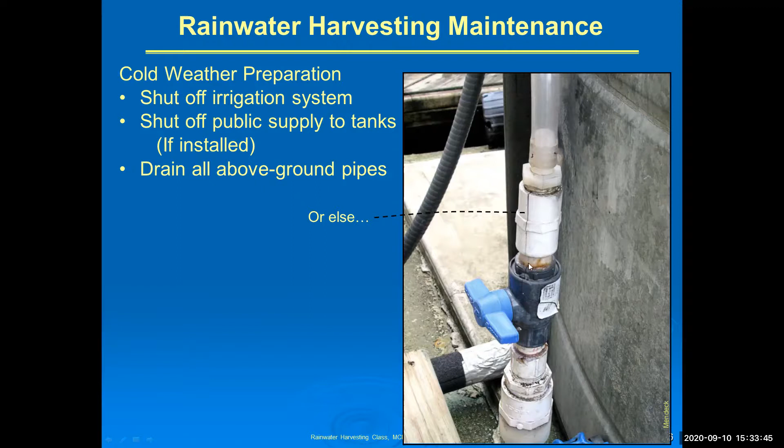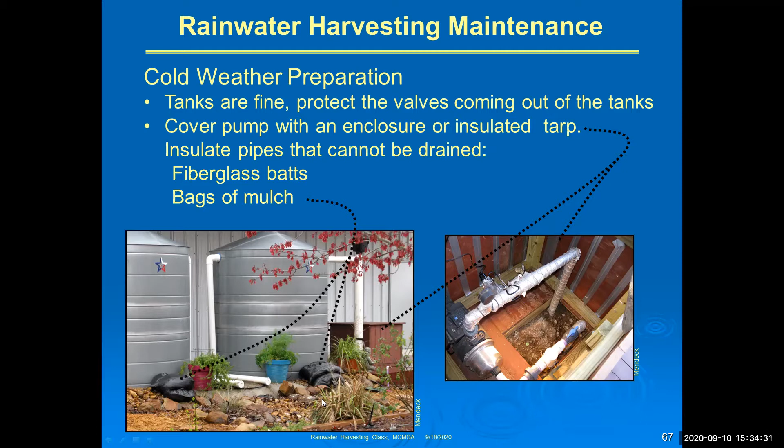When spring comes around and you no longer have a frost or freeze problem, you can take these out and put them around your plants. So you're not storing anything, not taking time to store stuff. Fiberglass batts or bags of mulch, either way, that's perfectly fine. Shut off the pump, unplug it, and drain the pump and lines. You want to make sure you don't trap water in any of these lines, because when it freezes, water expands and you can crack things. We don't want that to happen.

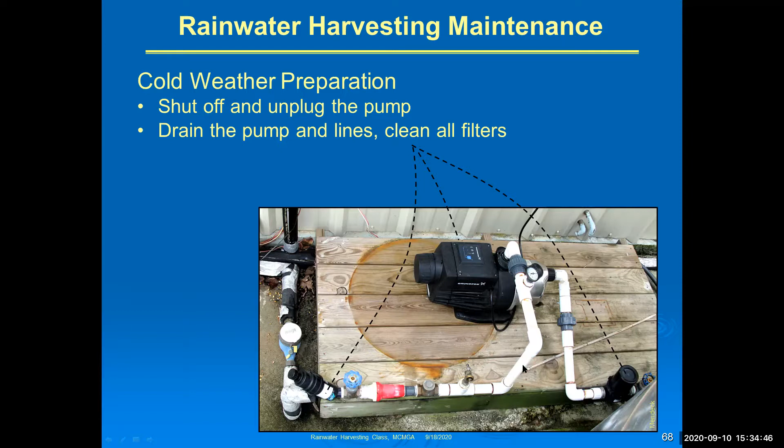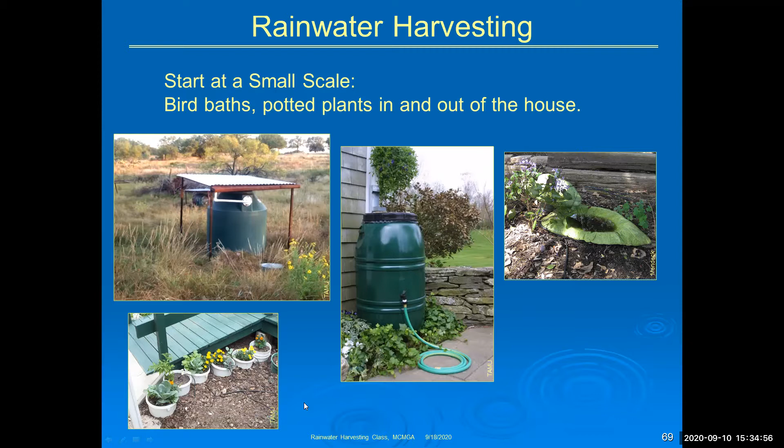So start on a small scale - bird baths, potted plants in and out of the house. We've talked about and shown examples of these earlier, so I'm not going to go through this, but start small and then build up as you feel like it.

Once you have your tank in place, you can decorate it. We talked a little about painting, and you saw some examples of painting smaller barrels. These are big tanks, and they're doing a great job with them. Most of these you have to put a base coat on so the paint won't flake off. A lot of these tanks are flexible, and as they expand and contract with the heat and with the volume of water going into them, it'll crack and the paint will flake off. So use the right kind of paint and use a base coat, and you should be fine.